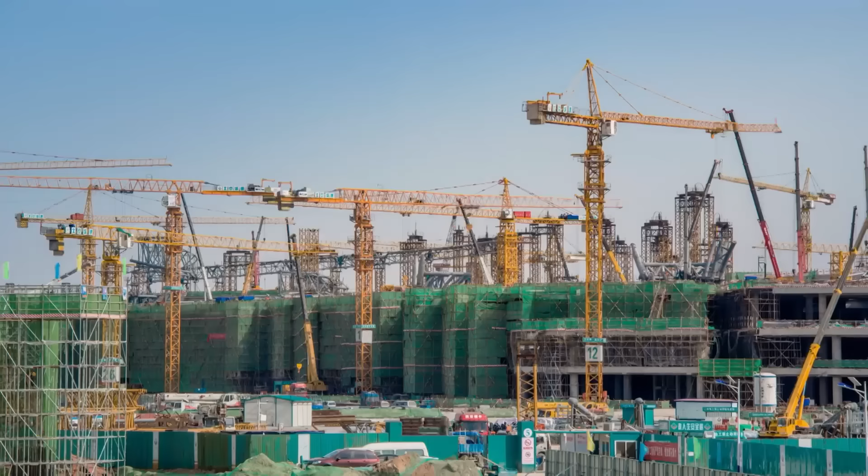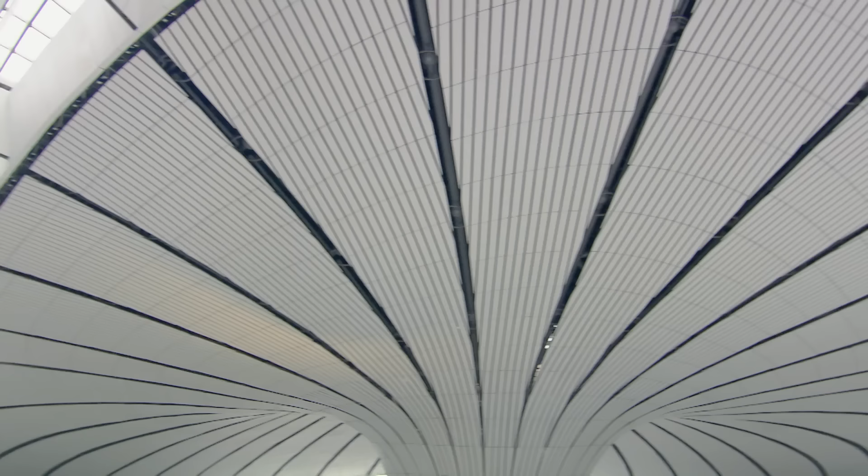The solution the engineers in China have come up with is stunning. This is the brand new Beijing Daxing International Airport. Currently under construction, it's set to become the biggest airport in the world. Wendy is getting the chance to see it before it opens to the public. Wow, I cannot believe how high the ceilings are. All of those dips and swirls are super amazing. It's very beautiful, very big, so exciting to see such a huge terminal here in China.

This airport is a benchmark for airport construction. We use a lot of cutting-edge technology to make this impossible project possible. I feel like an ant in this gigantic structure. Super grandiose, and you can barely even see how the structure is done. It's really well designed. Barely see any columns here. It's really amazing what the engineers have done here.

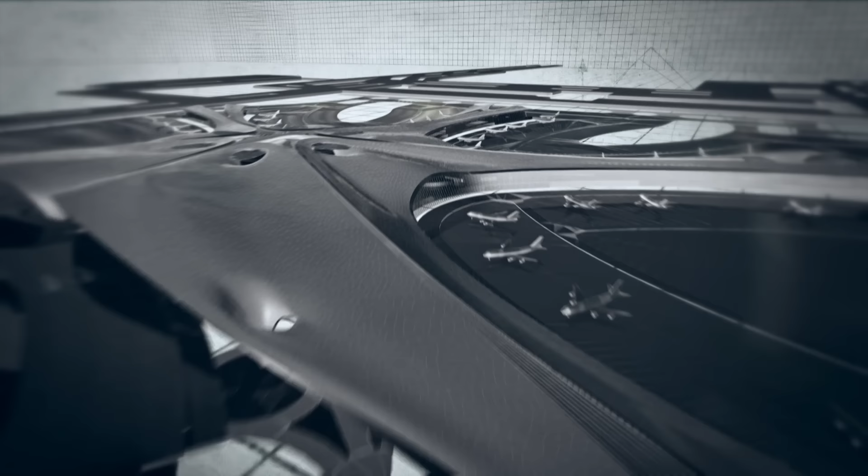Occupying more than 45 square kilometers, Daxing Airport's site is 2/3 the size of Manhattan. The spectacular star-shaped terminal covers 700,000 square meters, with a massive roof constructed from 52,000 tons of steel, equivalent to 500 steam engines. By the time the entire project is fully completed, it will include a record-breaking 6 runways and could see 100 million travelers every year. But with the old airport at crisis point, constructing this immense terminal is a race against time.

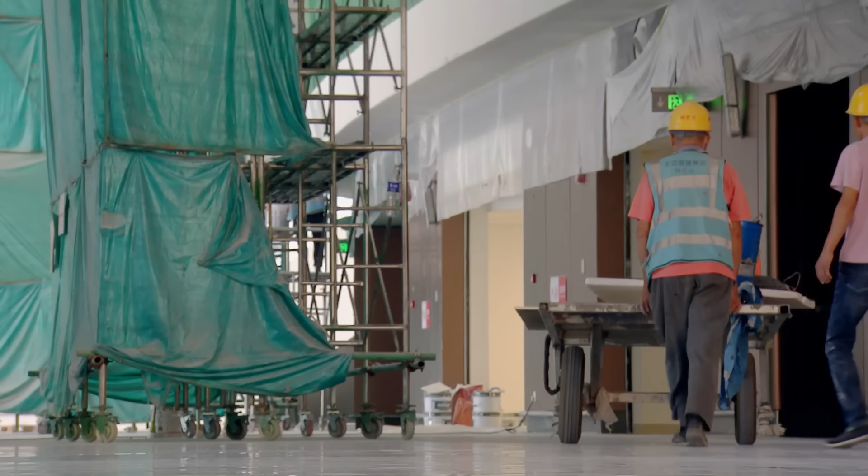我认为呢，航站楼最大的难点。 Wendy is finding out more from Deputy Engineering Manager Gao Aiping. 建设工期只用了3年零9个月。 So Mr. Gao is saying they need to build this entire terminal in 3 years and 9 months. That is an incredibly short amount of time to build an airport. Rapidly laying the groundwork for this extremely complex megastructure was the first step.

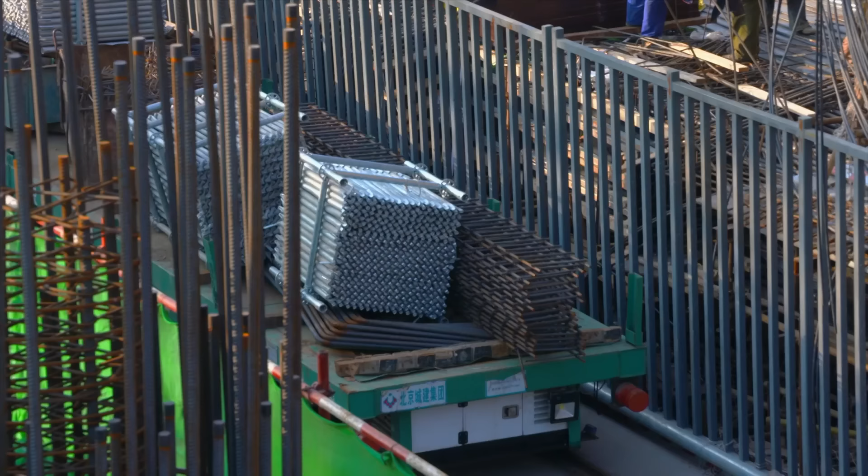How many people are making this project possible? 我们在施工的高峰阶段，航站区总人数近2万人。 Oh wow, that's actually pretty amazing. At peak times, there's about 20,000 people working on this project. And you could actually see there's a huge amount of people just working on different parts of the construction right now. With this vast workforce, it's hoped this entire terminal can be completed in record time.

But first, there are still major engineering obstacles to overcome. How do you move millions of passengers through the airport efficiently? How do you build the terminal's colossal, intricately curved roof? And most crucially, how do you protect the airport from devastating earthquakes? I think this is one of the most structurally impressive engineering projects in the world.

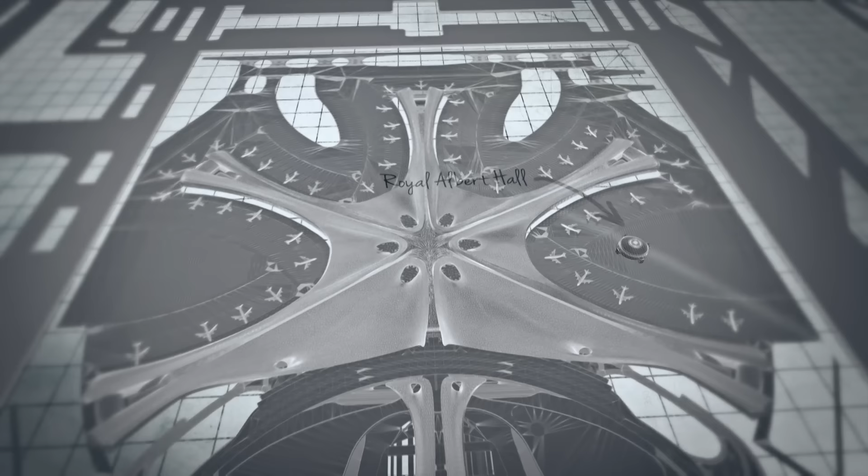Beijing's current airport is under tremendous strain. With China on track to become the biggest air traffic provider on the planet, the situation is critical. The solution? The new Beijing Daxing International Airport, set to be the largest in the world, with a terminal of epic proportions. At 700,000 square meters, the building is equivalent to 149 Royal Albert Halls. With high-speed train and metro links, this is the world's largest integrated transport hub.

But before this astonishing structure could be built, there's a crucial challenge with the design that needs to be solved. New York-based architect Wendy Fock has special access to visit the airport site. Getting to your gate at the airport sometimes is an impossible feat. You sometimes get lost, you don't see the signage, and sometimes you're just rushing in general. For a huge airport like this, to get over 72 million people through its gates, it's going to be super difficult. Designing the airport to guide passengers through it is something that engineer Wang Chung has to solve.

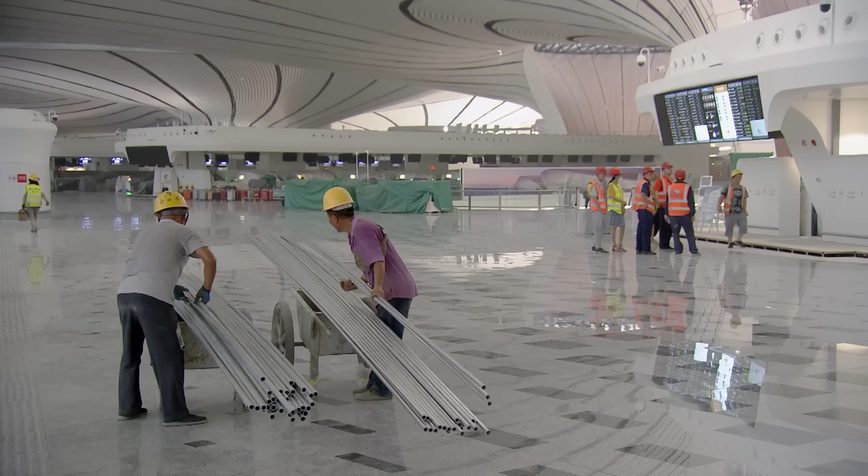If people cannot find the right direction, it will cause chaos in the terminal. So it's really important to get it right. But it's an exceptionally difficult problem for engineers. Passengers are unpredictable. Sometimes passengers will make mistakes, so we have to provide different passenger routes however they come. It's an extra challenge for the designer. So how do you move people around the airport efficiently? To find the answer, the team will need to draw inspiration from the pioneers of the past.

This is Midtown Manhattan. It's the heart of New York City, the largest city in the United States, and by virtue of being a place where everyone wants to be, one of the busiest cities. Architect Cara Michelle is investigating how her 19th century predecessors dealt with a sudden increase in demand for public transport. So it was an incredible challenge for the early architects of New York City to figure out how to get people onto and off of the island, especially during a time of unprecedented population growth. So figuring out a solution for how to transport both regular commuters and long-distance travelers on a daily basis was really difficult. A massive new transport hub would need to coordinate the smooth movement of people through it on a scale which had never been attempted before.

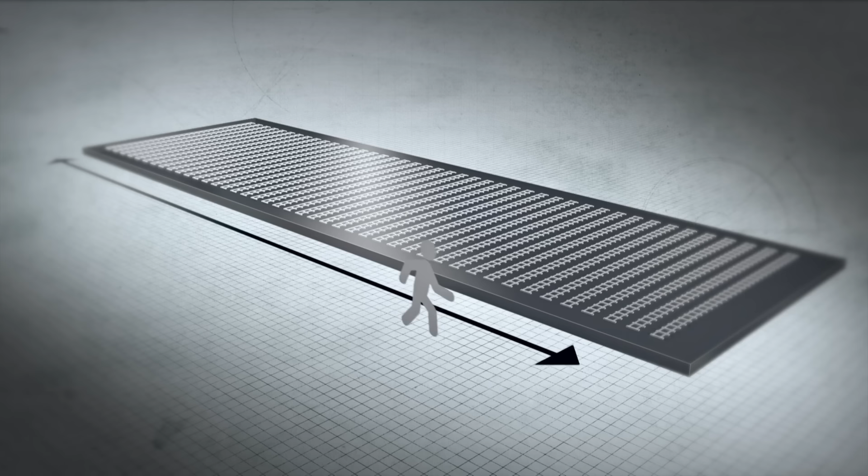Another one of the many innovations in Grand Central Terminal is the fact that the tracks are actually on 2 levels. Usually, rail tracks are laid out in a row. But with 44 platforms at Grand Central, that's a long way to walk. By splitting the tracks over 2 floors, it's less distance for passengers to walk. And there's another benefit. So you have long-distance passengers who need a little bit more time to get on the train, have more baggage on the upper level. And then you have short-trip commuters on the lower level. And another innovation is looping tracks. So they're actually dropping passengers off on one platform and then looping around to board departing passengers on another platform. Every piece of the design and architecture in Grand Central Terminal is really focused on getting people moving more efficiently and more quickly through the station.

Grand Central Terminal is a world first. Despite being built in 1913, it still works brilliantly today. So what Warren and Reed accomplished here over 100 years ago truly revolutionized the design of transportation hubs. And it's a wonder to think that designers of transportation hubs all over the world are still looking to this space to understand how to effectively move people around. I mean, it's really a marvel and a monument, almost a cathedral, to good engineering.

In China, engineers have built upon Warren and Reed's groundbreaking designs to create this cutting-edge 21st century airport. Instead of having the 79 departure gates in a row, they came up with an ingenious way to compact them and reduce walking times.

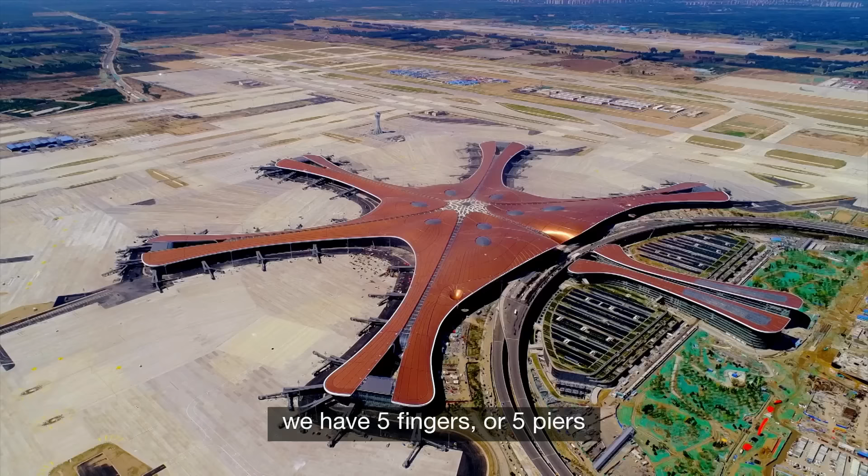The shape of the building is like the hand. We have 5 fingers or 5 piers. And also we control the size of the terminal. From center of the terminal to the furthest gate, it's just 600 meters, which means it will just take you 8 minutes to go to the furthest gate. It's excellent considering the size of the terminal.

To help people spot their gate quicker, engineers used another strategy. We create open space in the terminal, and for passengers, it's very easy to find the gate signs in this kind of open space because there's no columns, no barriers to block the sign.

Just like at Grand Central, Daxing Airport is engineered to keep different types of travellers separate so they don't get in each other's way, whilst ramps and travelators help keep people moving. This is the center pier, is for the international flights. This side, the two piers, is for the domestic flights. The other side is two piers, is also for the domestic flights. And passengers from check-in counter to the gates, they always go down with one clear, efficient direction to optimize the passenger flow.

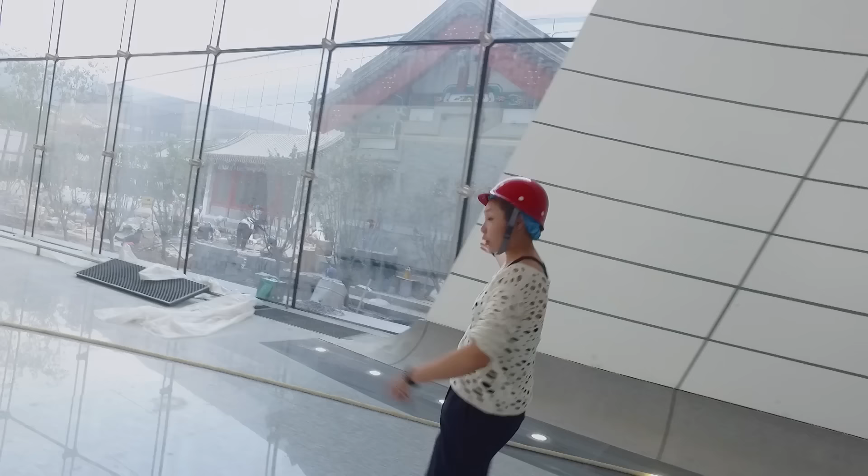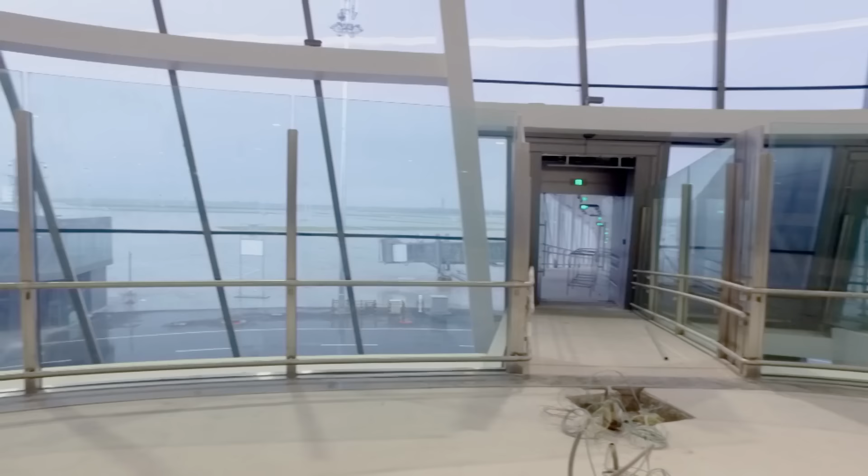See behind me this beautiful Chinese garden that's still in construction. And we're close to the end of the terminal. So here we are at the end of the terminal. We've made our flight. Despite being such a huge airport, took less than 6 minutes. That's under what the engineers estimated. That's pretty incredible. Coordinating the movement of a potential 100 million people a year is a massive achievement for the engineers of one of the largest terminal buildings ever constructed.

The Daxing Airport buildings cover 700,000 square meters. When finished, the 7 runways will accommodate an astonishing 880,000 flights per year. In China, air travel is booming. To cope with the increased demand, something exceptional is needed. So engineers are building the Beijing Daxing International Airport, a cutting-edge transport hub on a scale never seen before.

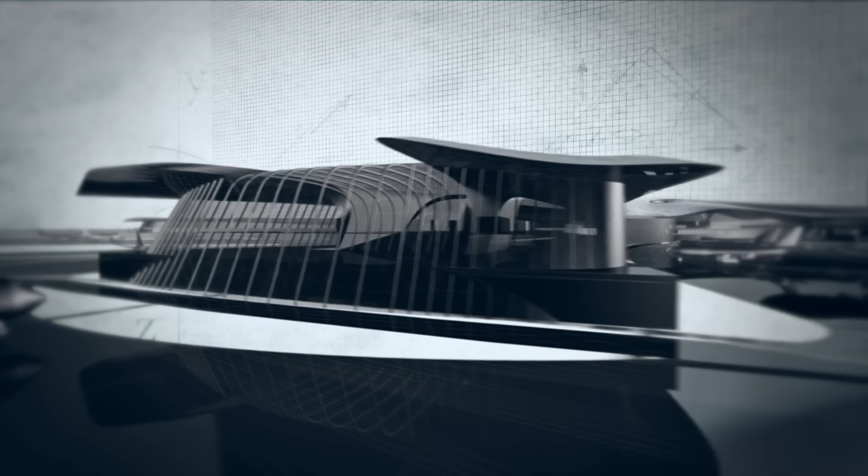Handling 880,000 flights a year, the terminal is constructed on the world's biggest seamless slab of concrete, which at 180,000 square meters is more than 7 times the size of Rome's Colosseum. I think it's a beautiful structure. Architect Wendy Fok has been invited to explore the airport before it opens. Personally, I really love how the span of this entire building is actually from a center point. It's really cool. I think the structural engineers did an amazing job here.

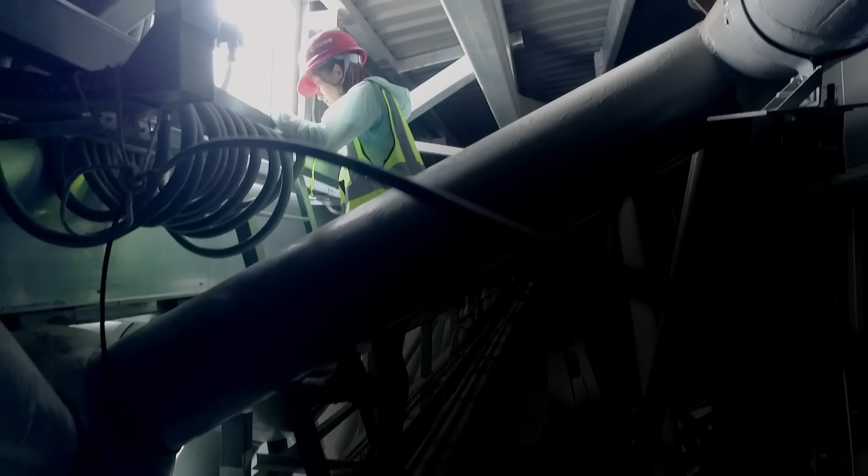Constructing a single terminal building on such an unprecedented scale was a huge challenge for engineers like Lei Su, who has special access to one of the project's biggest challenges. Be careful here. The enormous roof. The roof is very big, we can see. The area is 180,000 square meters. It's one of the biggest terminal roofs in the world. It's not only a structure, it's like a piece of artwork.

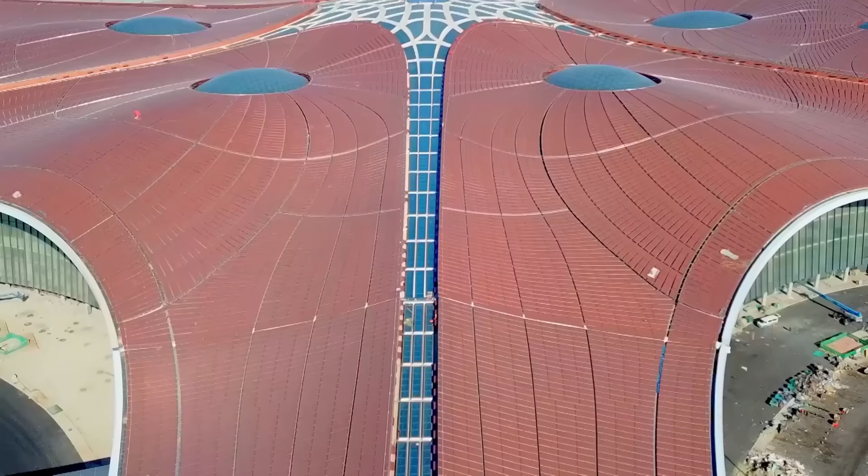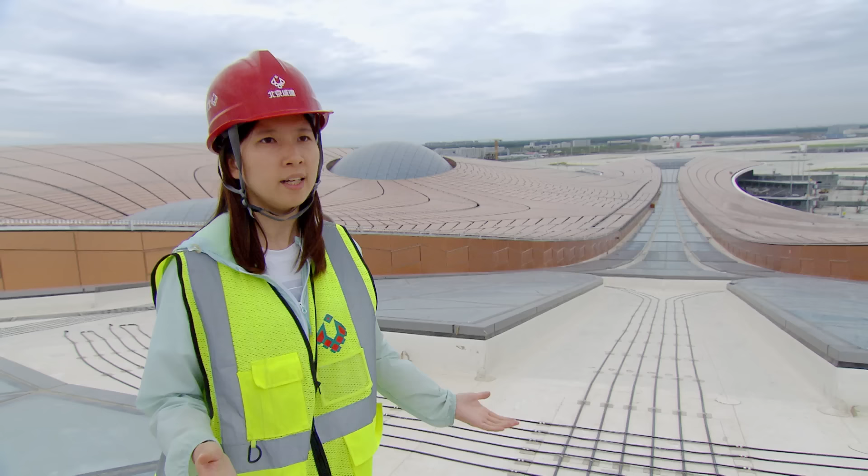The artistic roof is an extremely complex shape with multiple flowing curves. It's very difficult to build this kind of roof because the curves have different directions, and from the high point to the lowest point, the height difference is almost 27 meters. Building this kind of roof is the biggest challenge of the terminal construction.

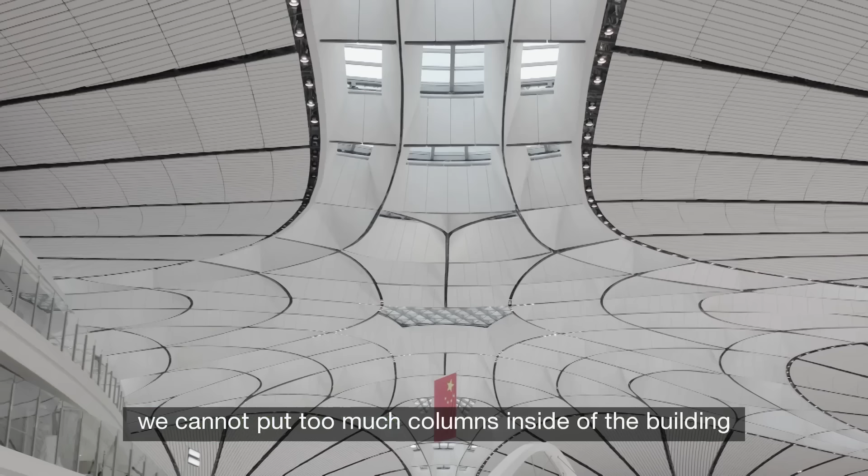The problem was made even harder by the need for an unobstructed space inside the airport. In order to make much more space inside, we cannot put too many columns inside of the building. So how can we hold such a big roof with fewer columns? A traditional concrete and girder roof would be too heavy. So to solve this seemingly impossible challenge, engineers would need inspiration from the pioneers of the past.

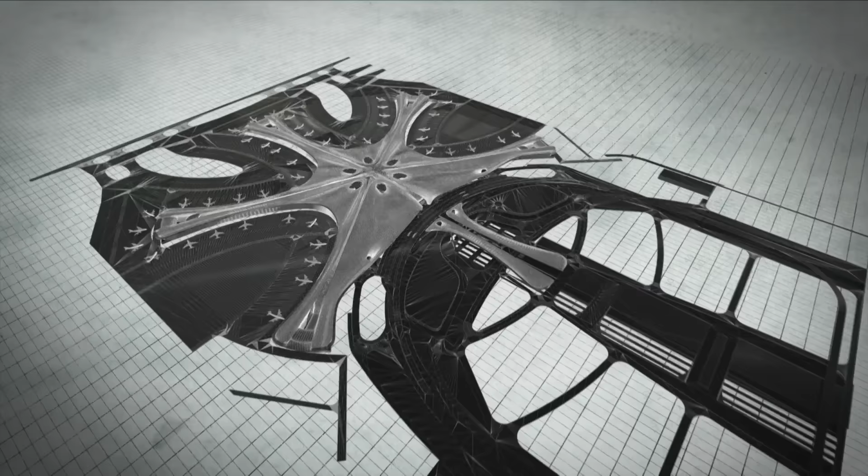We are in Split, very old, beautiful Mediterranean town. We believe that we are the sportiest city in the world. Architect and sports fan Dinko Peracic lives in Croatia in southern Europe. In 1979, Split was chosen to host the Mediterranean Games, and the pressure was on to build a world-class arena. One of the biggest challenges was to make an athletic stadium for 55,000 people in the audience, and the design of the stadium had to be something really special.

The games were held during the summertime, so it would be definitely too hot for spectators. So the roof had to be built to protect them, and it was important that the roof doesn't have supporting columns. They would block the views, so it was a big challenge. And what engineers came up with is awe-inspiring.

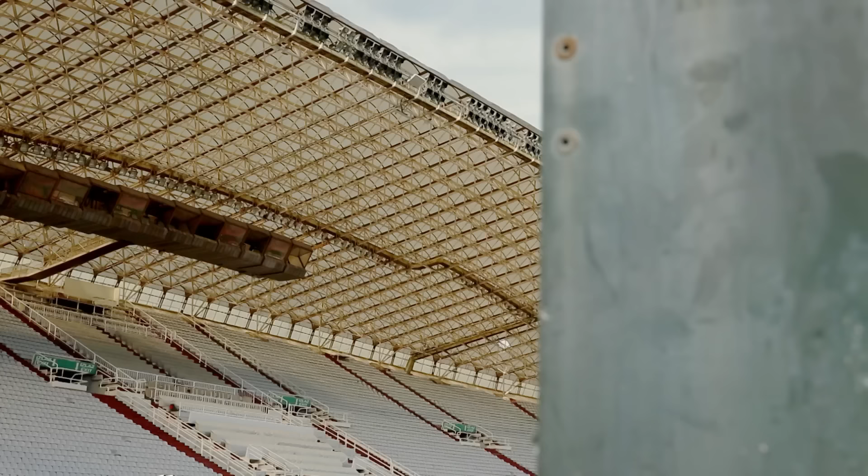Here we are, Sports Stadium Poljud in Split. Yeah, this is a wonderful piece of architecture, wonderful piece of engineering. These massive steel roofs are each 220 meters long, covering a combined area of more than 13,000 square meters. When it was built, this was the largest curved roof of this kind in the world.

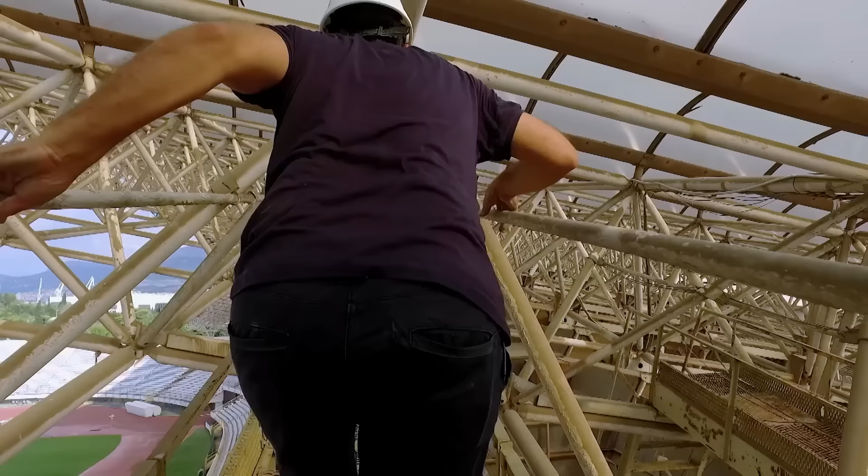These long-span roofs wouldn't have been possible without Alexander Graham Bell. Famous for inventing the telephone, in 1902 he became interested in flight and made huge wings of interconnected pyramids. The technique became known as a space frame. And Dinko has a unique opportunity to take a closer look.

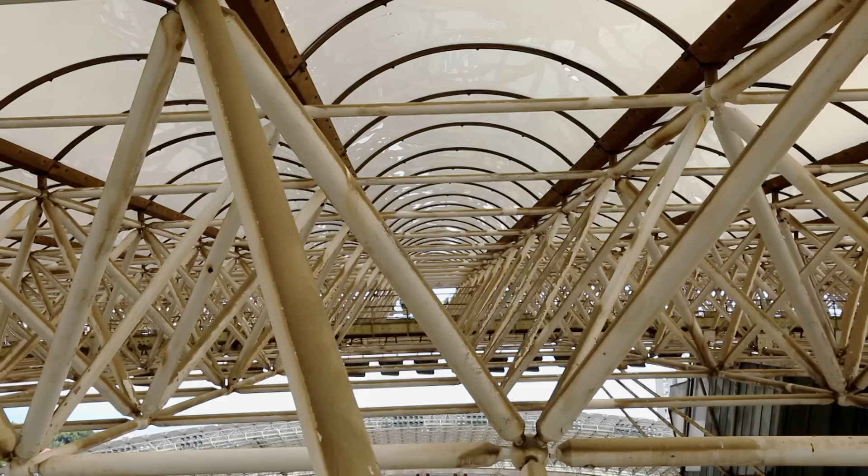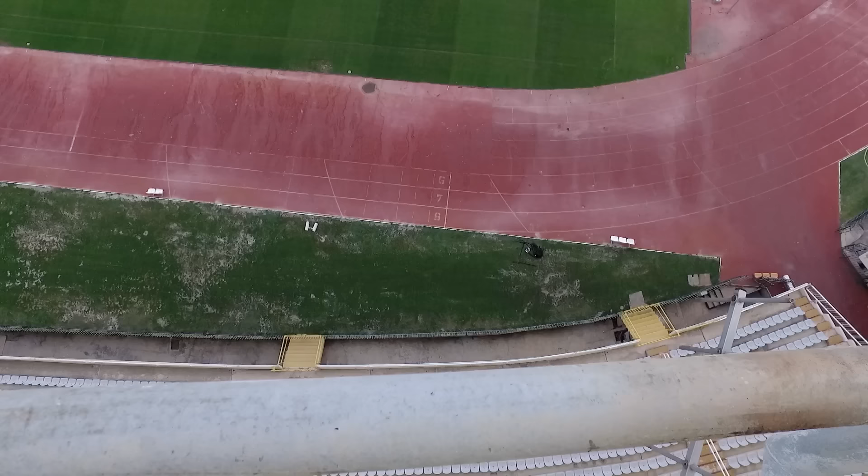Yeah, here we are in the roof. This is a space frame construction. This is a structure that normal people can see just from below. You see that there are no columns supporting you. There is just air below us. I have to hold my helmet so that it doesn't fall down.

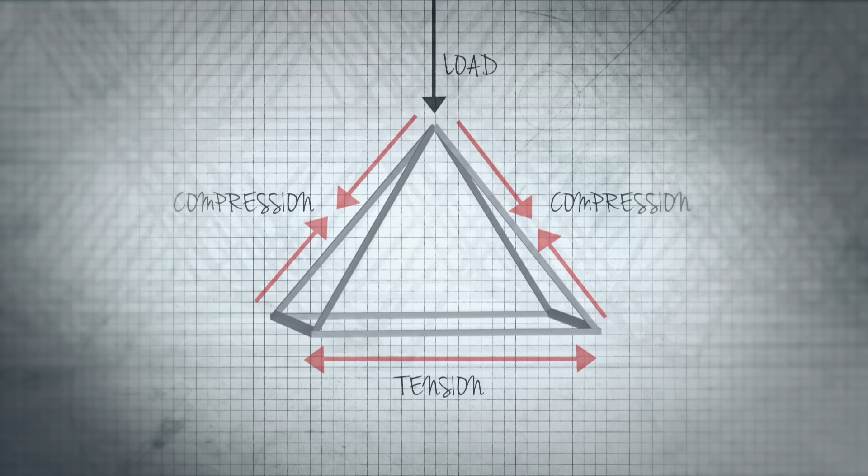Here we have those triangular pyramids made out of 12,000 poles and more than 3,500 balls, creating this shape, this spatial structure. Pyramids are very strong in all directions because they spread forces evenly. And these frames don't need much material to build them, so they're also very light.

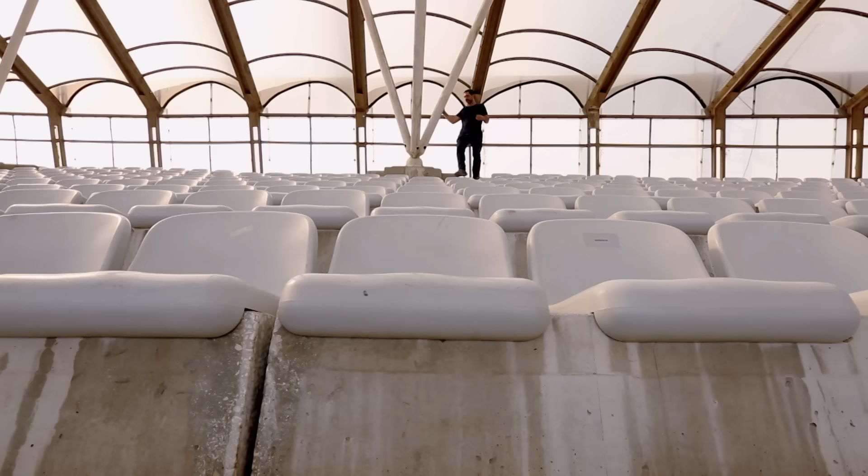Space frames are made of straight poles, but this roof has multiple curves. To show how this is possible, Dinko is building his own space frame. And this is a very lightweight structure. This space is mostly air. There is just a minimum of material. The story becomes interesting when we start to multiply these elements. We can simply connect them together and get a chain of pyramids, which is actually creating a spatial frame.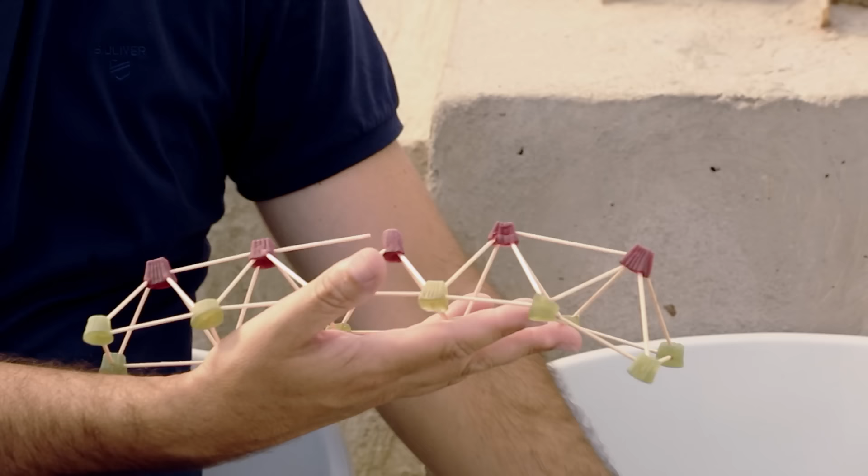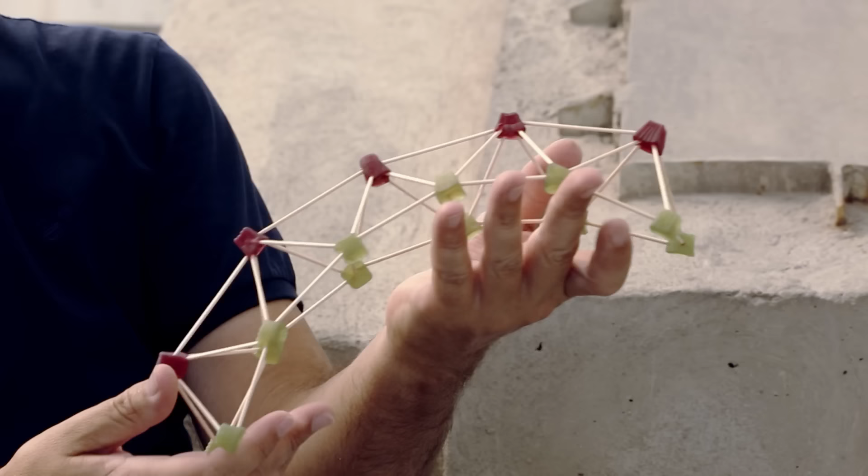To make this roof curved, engineers made some of the poles longer and changed the angle of the connections. By simply introducing longer poles, we get a curved structure. It's almost like a fabric, which can be very flexible to work with. In these two roofs, there are more than 1,000 different lengths of poles and more than 1,500 different connections. But to calculate each of those elements, it's really complex.

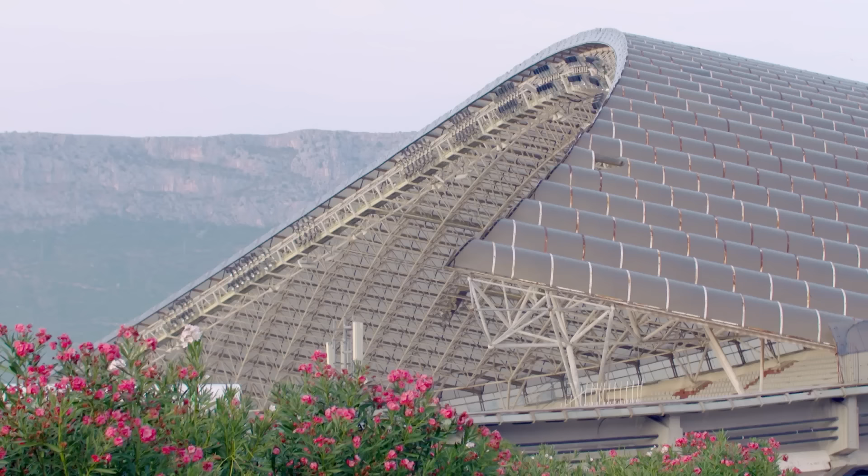For decades, calculating the thousands of different elements required for a multi-curved roof was thought impossible. But advances in another field provided a breakthrough. So the roof of this stadium was the first one where computers were used to calculate these specific elements. Using computers here proved space frames could form almost any shape of long-span roof. Essential for the engineers in China.

70 years after Alexander Graham Bell invented his space frames made out of triangular pyramids, it was used in a very creative way here in Poljud, in this stadium. I'm really proud that I'm part of this culture that was able to construct something like this.

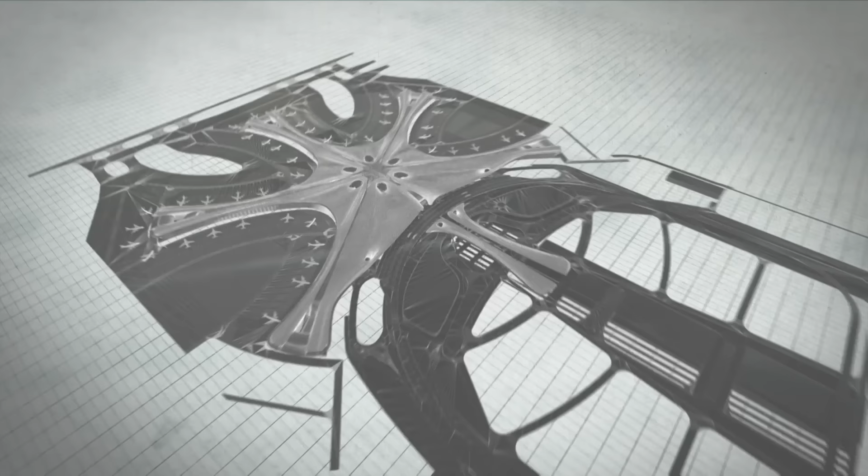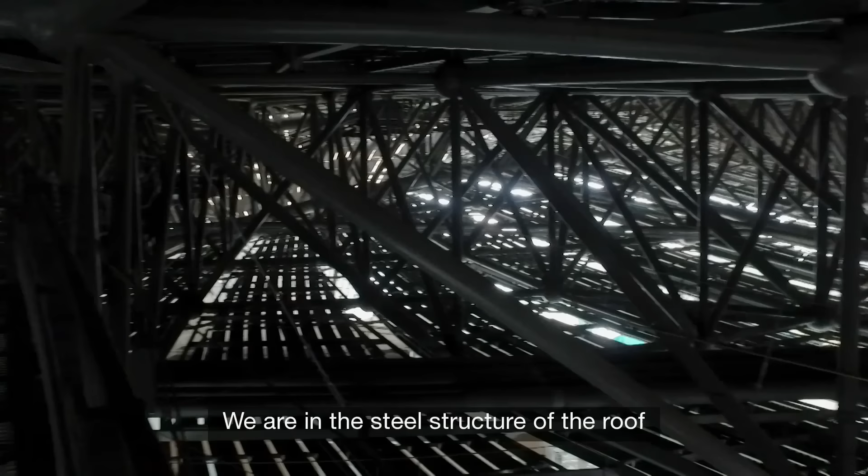Engineers in China have taken the space frame innovation and created a roof 13 times the size of that on the stadium in Croatia. This jaw-dropping structure that makes this terminal roof possible is completely hidden from passengers. But Lei Su has permission to see it up close. We are in the steel structure of the roof.

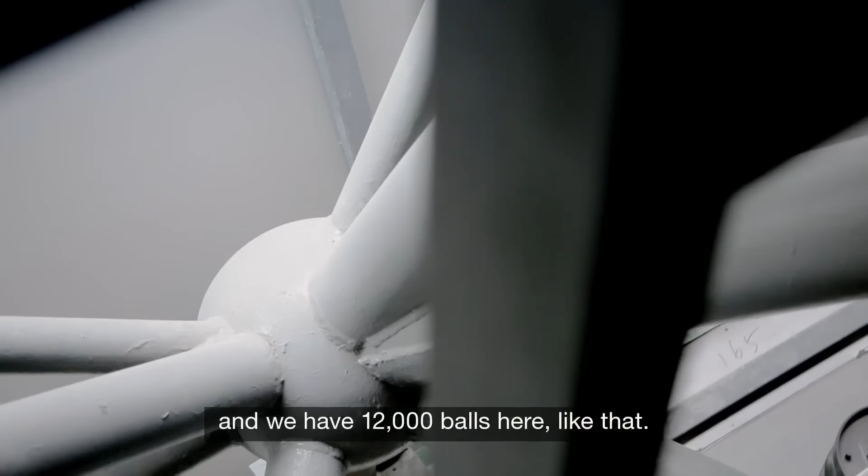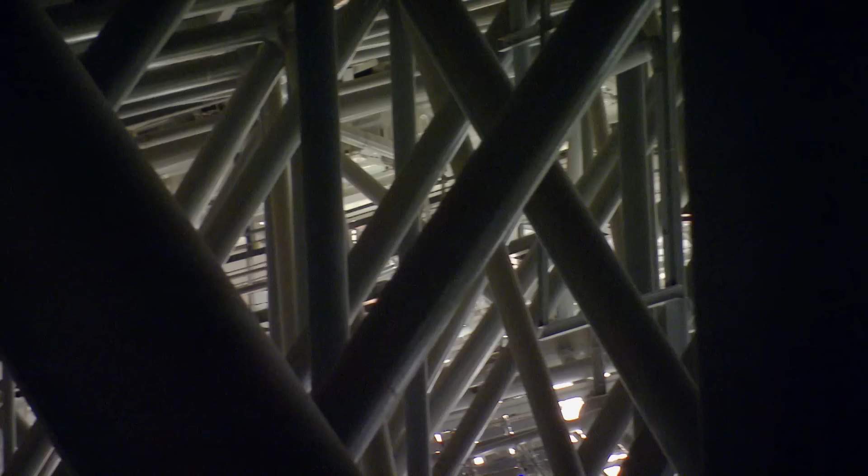We have 63,000 poles like this, and we have 12,000 balls here like that. We use a steel structure so it can meet the stiffness, but it's still very light. With the help of computer design, these poles and balls could form the complicated multi-curved roof.

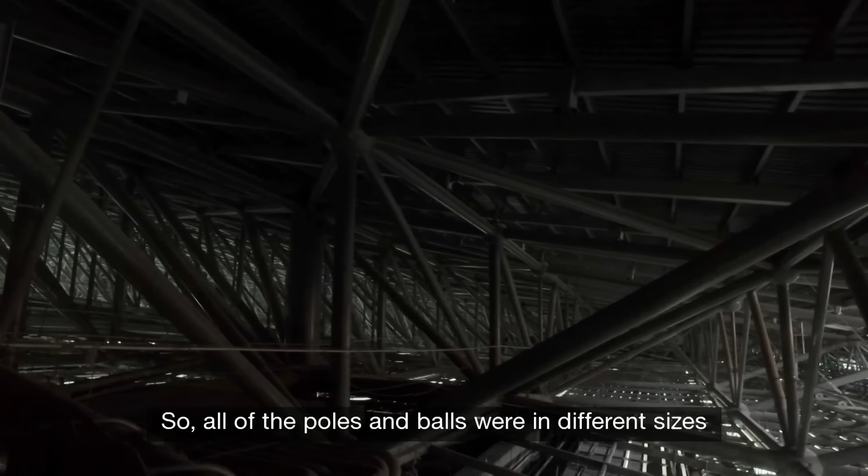We have many kinds of curve, so with the ball and the post, it's easier to meet the different shapes of the design. So all the poles and the balls are in different sizes. Some are long, some are short, some are big, and some are small. With 75,000 individual parts, assembling this supersized roof could be a big challenge.

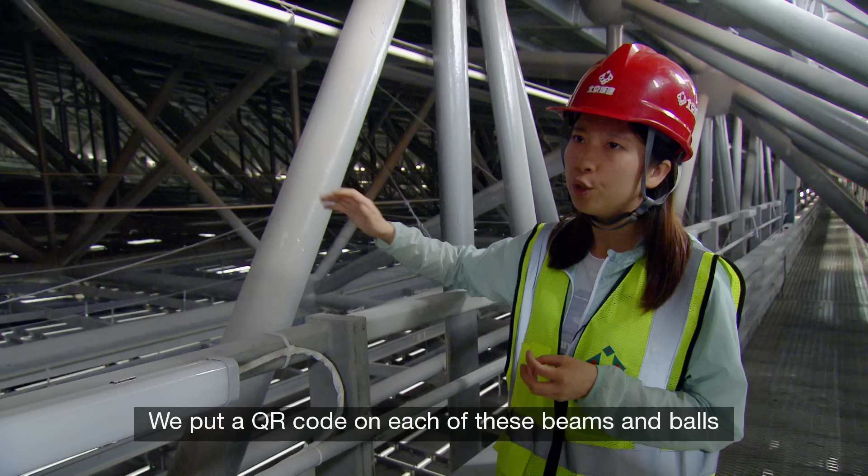Because we have many kinds of posts and balls, we use a new technology. We put a QR code on each of these beams and balls. So with this, we use a mobile phone to scan the QR code, and we know exactly where the ball and the pole go on the roof, and we can put it together very smoothly. Once the basic shape of the terminal was in place, the complicated space frame roof could be built.

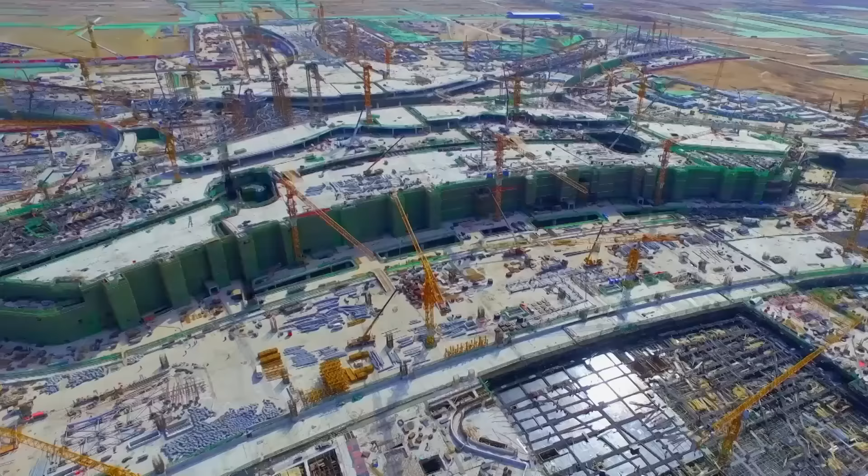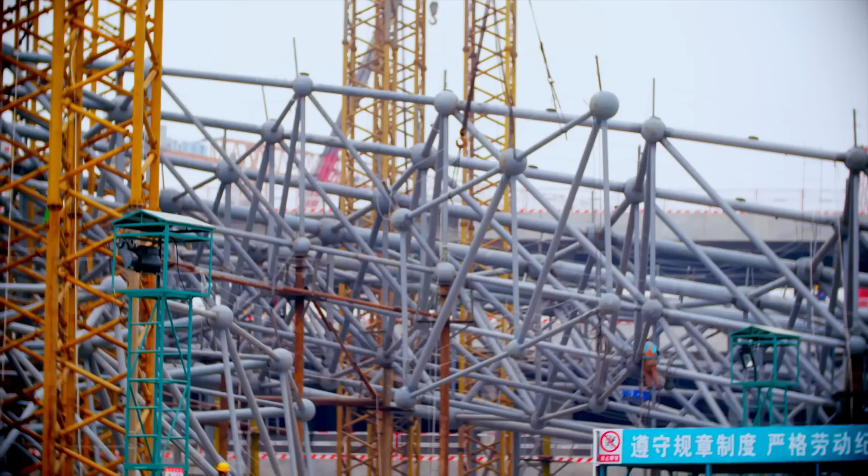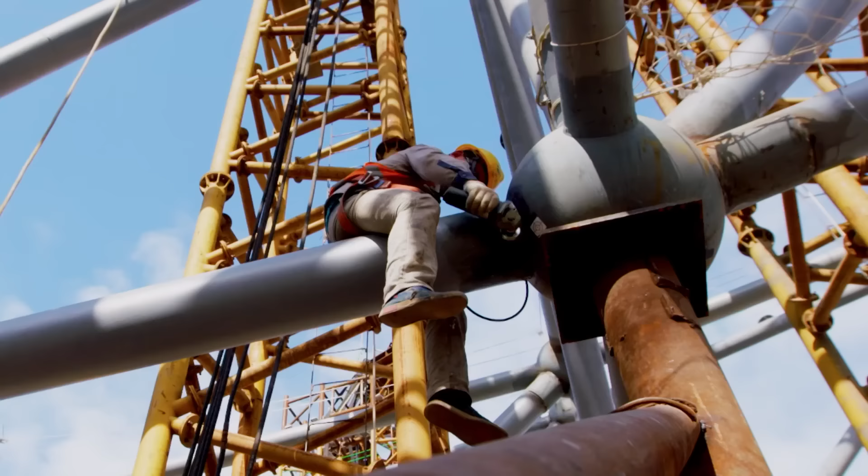First, 8 huge columns are made. Then the gigantic roof is constructed in several segments. We weld the tubes and the balls together on the ground and lift it. Each section must be positioned precisely, with 2mm accuracy. Any error could jeopardize the stability of the whole structure.

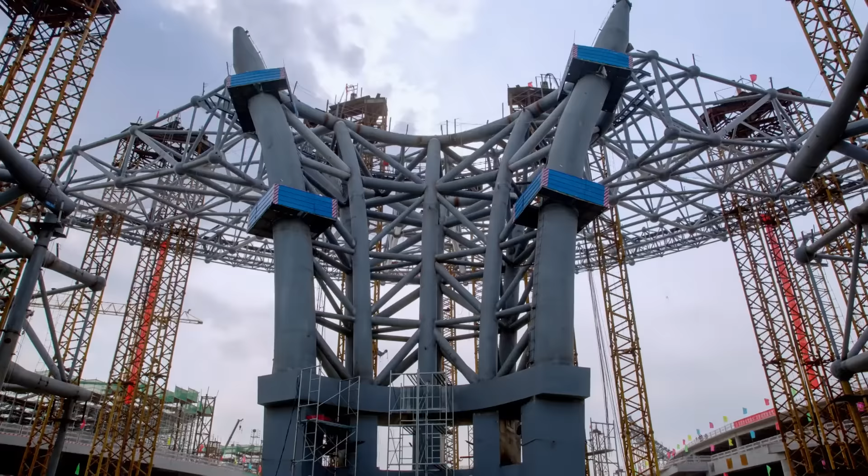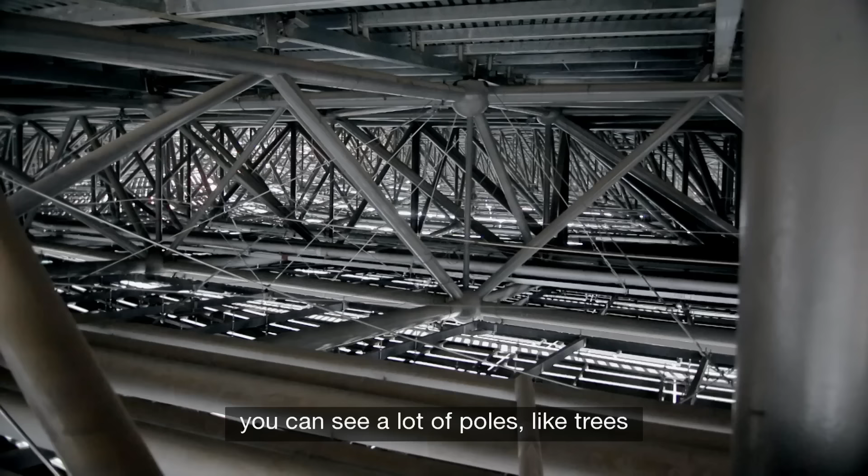We joined the sections together and formed one big roof. The center section is lifted last, completing this astonishing space frame. It's like a steel forest. It's very beautiful. You can see a lot of poles like trees.

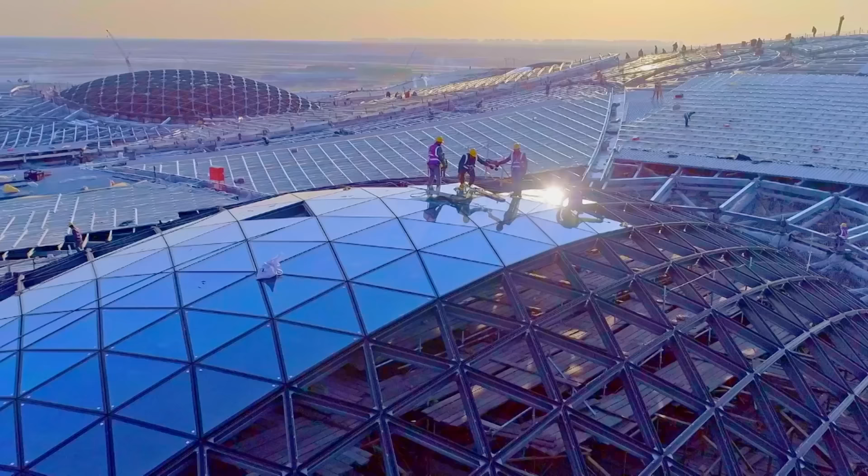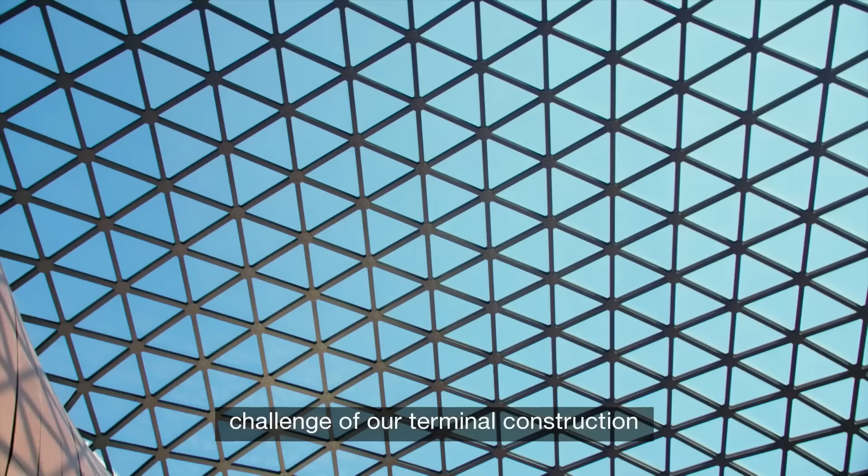Inside, cladding is added, which dampens the noise in the terminal. On the roof, 8,000 panes of glass make the skylights. And 40,000 sections of sparkling aluminium cladding finish this incredible structure. The steel structure is the biggest challenge of our terminal construction. What most impressed me is how fast we built it. I'm proud of it.

Visiting architect Wendy is taking in this gravity-defying marvel. For me, I think the roof structure is just absolutely incredible. You can barely even see any of the columns. Especially standing in the center point, you could really see everything from here. The colossal roof needs just 8 columns to support it, which is only possible because the space frame engineering allows such long and lightweight spans.

I think it's actually incredible that so many components were brought together to make this gigantic roof system. It required so many innovative systems to really put together the different pieces of the roof and then joining it with such precision. This is truly one of the most remarkable roof structures that I've ever seen.

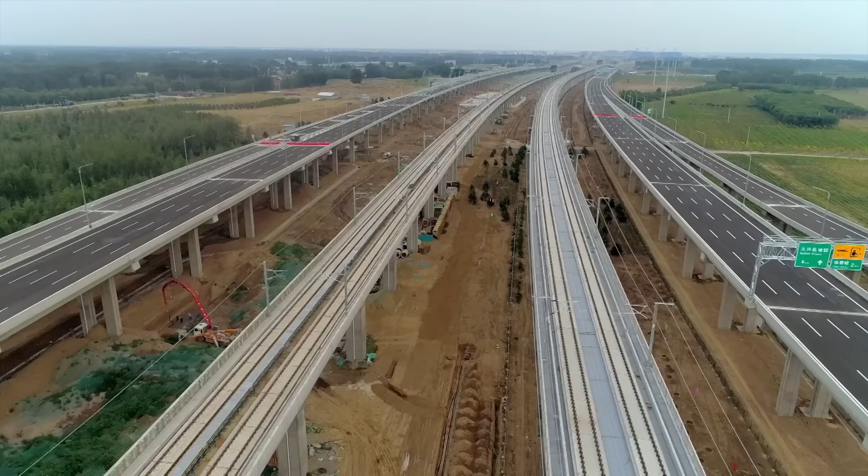Engineers in China are attempting to achieve the impossible. This is the Beijing Daxing International Airport, a futuristic engineering marvel, on track to be the biggest airport on the planet. The way that it's constructed is truly amazing. I think it is really remarkable that the engineers were able to make this happen.

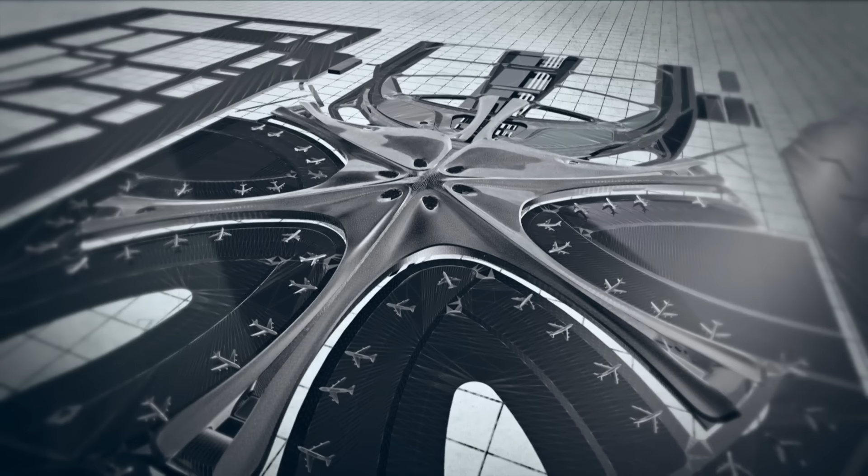Across the new airport site, 1.6 million cubic meters of concrete forms the runways and base of the massive 7-story terminal. Its steel roof weighs 52,000 tons and is held up by only 8 columns. Engineers must now take on one of the most serious challenges of the project. Beijing is located in the earthquake zone in northern China. In history, there are some major earthquakes that happened in this place.

It's a life or death problem that falls on engineer Wang Cheng and the design team to solve. It's really important to protect the terminal from earthquakes. There are tens of thousands of passengers and staff in and out of the terminal every day. Secondly, after an earthquake, the airport is usually the lifeline for the rescue supplies and personnel.

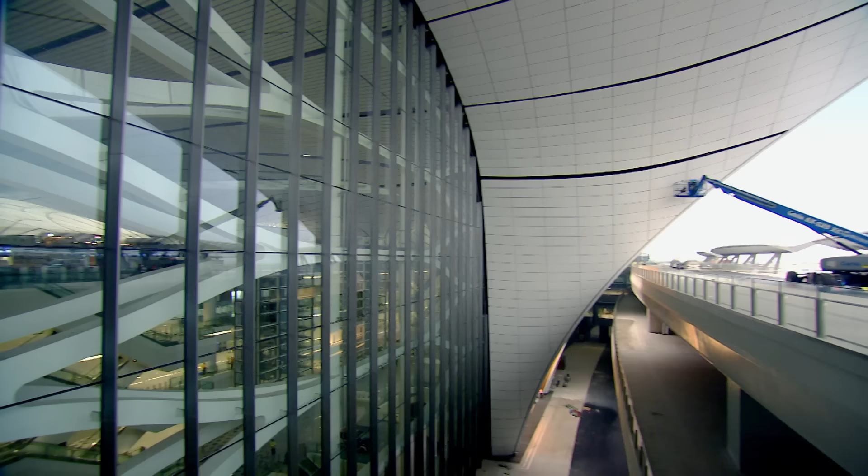It's common for Beijing to have earthquakes of 2 or 3 on the Richter scale, but they can be much more severe. It is a huge terminal. To protect it during an earthquake is very difficult. This is one of the biggest challenges we have to solve. During a devastating earthquake, how do you ensure this vast transport hub is protected and remains operational? To solve this critical problem, engineers must look to history's ancient innovators.

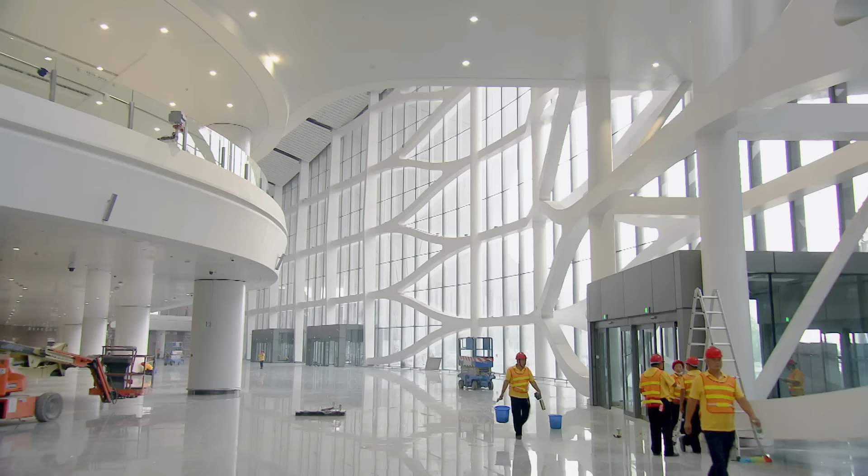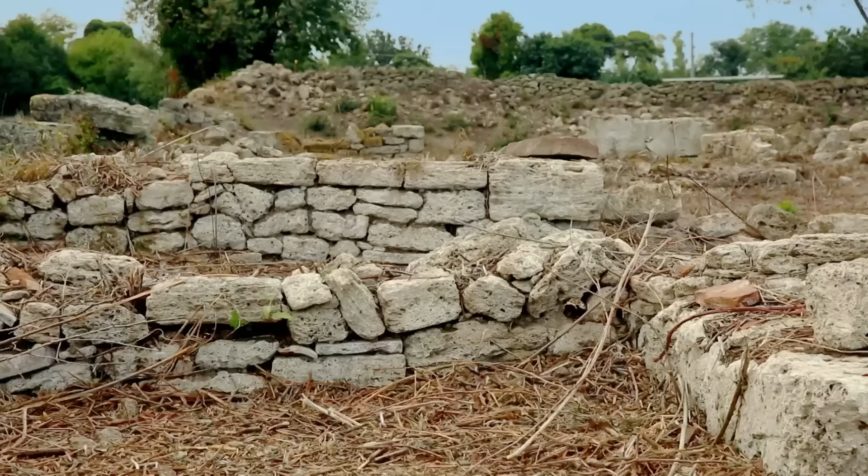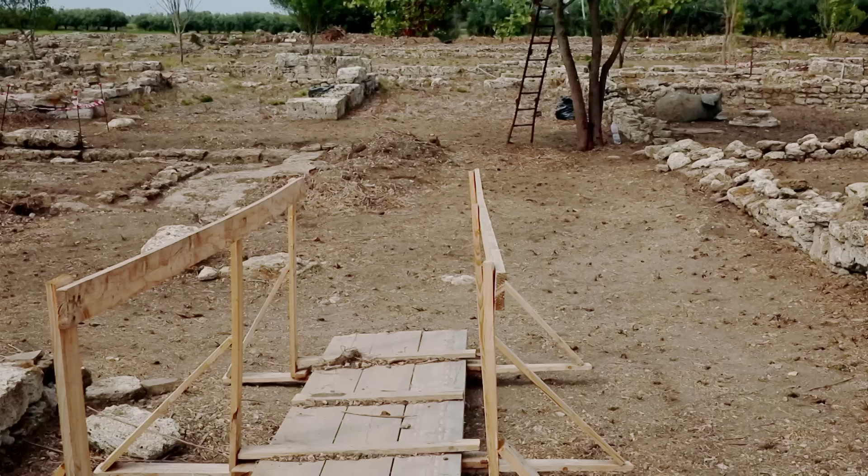Archaeologist Gabriel Zuchtriegel is investigating an ancient Greek settlement, which could help the engineers in China. We are in Italy, south of Naples, but the site we're looking at is actually a Greek site because the Greeks founded colonies in Italy, and one of them is Paestum, which was a big city founded around 600 BC. But building in Italy is difficult. It's one of the most seismically active regions in Europe.

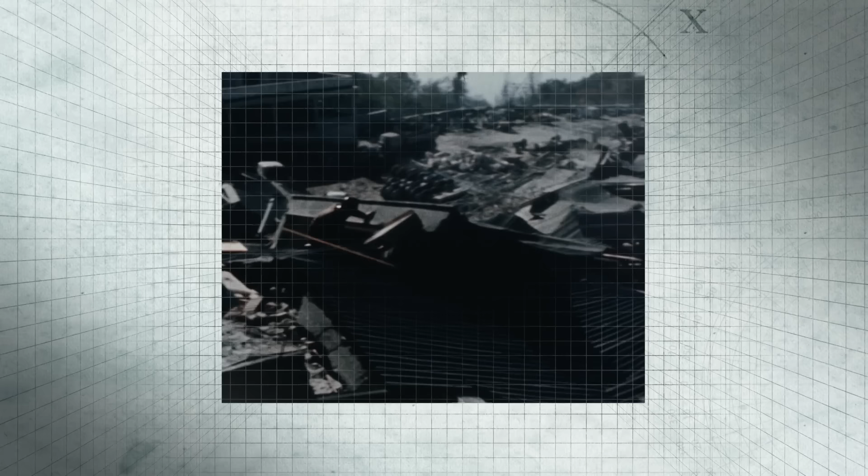We had some major earthquakes in recent years, and we saw that many modern buildings collapsed. What we see on some classical sites like Paestum is that there's still buildings standing from 2,500 years ago, and you ask yourself, how is it possible that these buildings have resisted for so much time? Ancient Greek civil engineers were master temple builders, and many have survived to this day. These are the stunning temples of Paestum.

We have 3 Greek temples still standing here, and the biggest one, the Neptune temple, has 6 columns on the short sides, 14 columns on the long sides, 5th century BCE, still standing. An extraordinary example of Greek engineering because it resisted all the earthquakes. Coming from a highly active earthquake zone themselves, the ancient Greek engineers had an ingenious way to tackle the problem.

While the foundations are very, very solid, the columns are much more flexible. And you see they are built of several pieces, we call them drums. They didn't use any mortar, and so it's not a rigid, solid block, but it's pieces, one piece sitting on the other, so they can move and swing up to a certain degree. And as soon as you have more than one element, the behavior of the column changes.

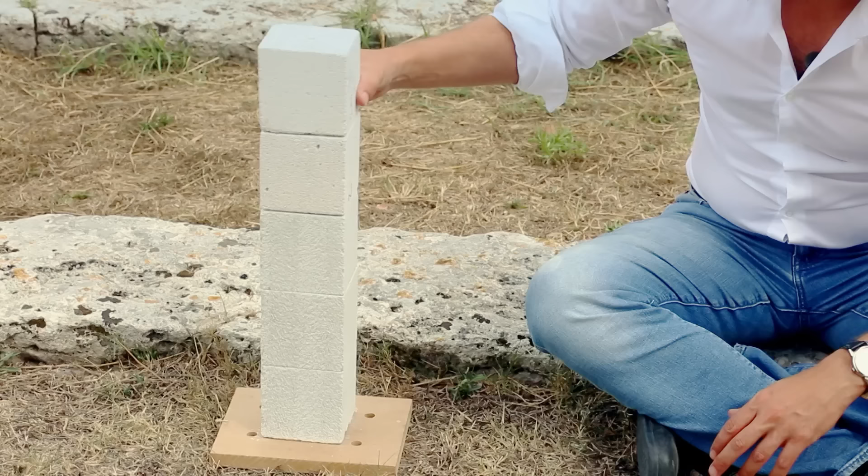Building columns from several drums without mortar was crucial to these temples' ability to resist earthquakes. It's a technique that could help the engineers in Daxing Airport. We have here our column, but it's one piece. We glued it all together.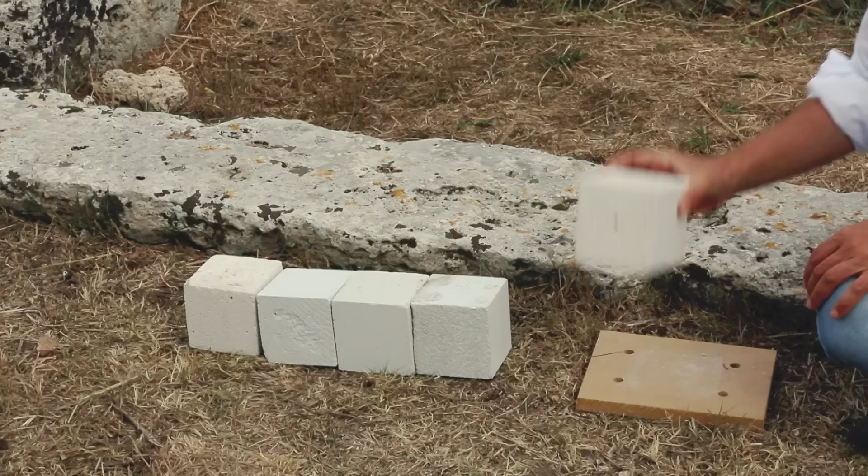So when we have an earthquake, we see that it shakes, it behaves as one piece, and you have a high concentration of energy here, and then it eventually collapses. The movement of the earthquake is totally transmitted to the top of the structure. But the column drums in these temples are not stuck together with mortar. So Gabriel is repeating the experiment with separate blocks.

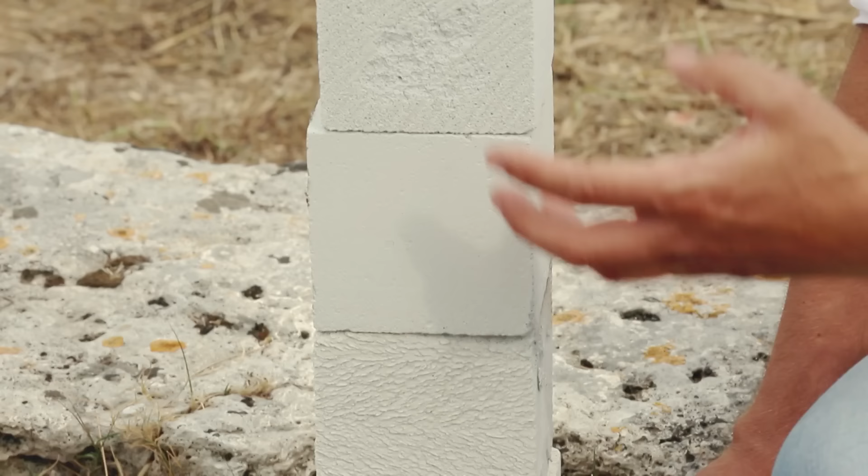And look what happens if you don't have one rigid piece, but a column built of several pieces. And now the earthquake comes and you see that I can put in more energy and it still doesn't collapse. And you can see how it opens and closes the single element. And basically each element absorbs energy, so much less arrives at the top than what the earthquake gives in at the bottom. So this is the original ancient Greek damper and isolation system.

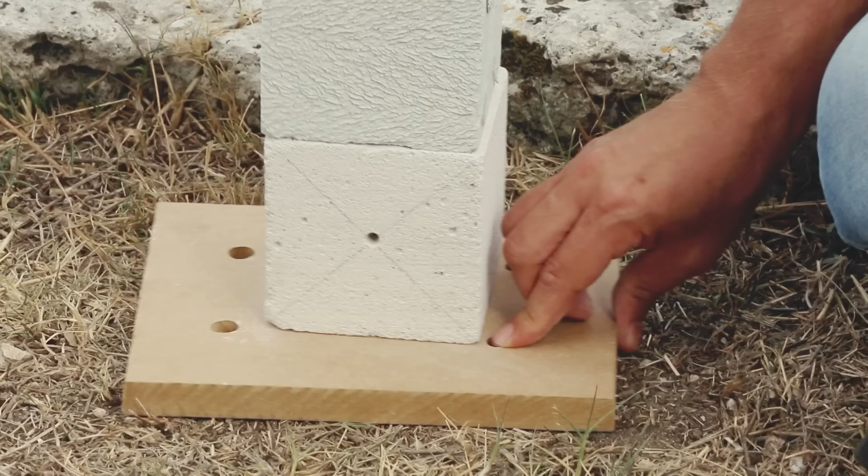This isolation method provides astonishing earthquake resistance for these monumental temples. This structure has been standing for 2,500 years. This is really a great achievement. At Daxing Airport in China, engineers are using similar principles to the early Greek temple builders to protect this pioneering terminal from earthquakes. But here, it's on a much bigger scale.

So right now we are at the basement first floor under the terminal. Look at the pillar. On the top of it, we install an isolation damper. The isolation damper is like a spring or rubber to protect the terminal from earthquake.

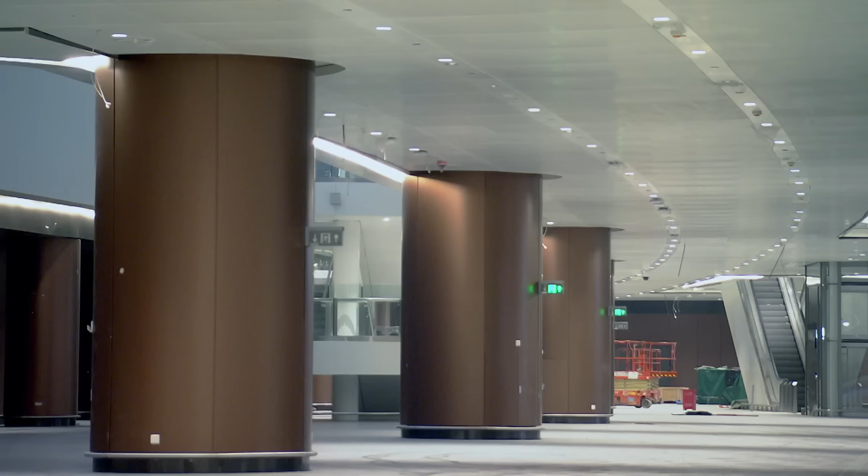Usually there are two kinds of movements during the earthquake, horizontal and vertical. And for the building, the horizontal movement is the most damaging. So the damper lets the building move forward and come back to the place where it was to release the horizontal earthquake energy.

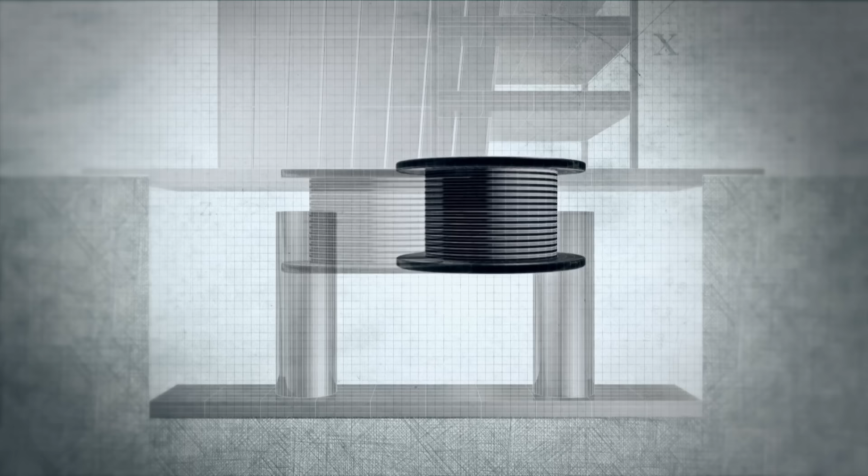The dampers are made from a stack of 30 rubber and steel discs on a spindle. Like the stones in the Greek columns, they're not stuck together. In an earthquake, instead of holding the building firm, they let it move horizontally back and forth. This dissipates the energy, isolating the terminal from the earthquake. They also have another surprising benefit for this unique transport hub.

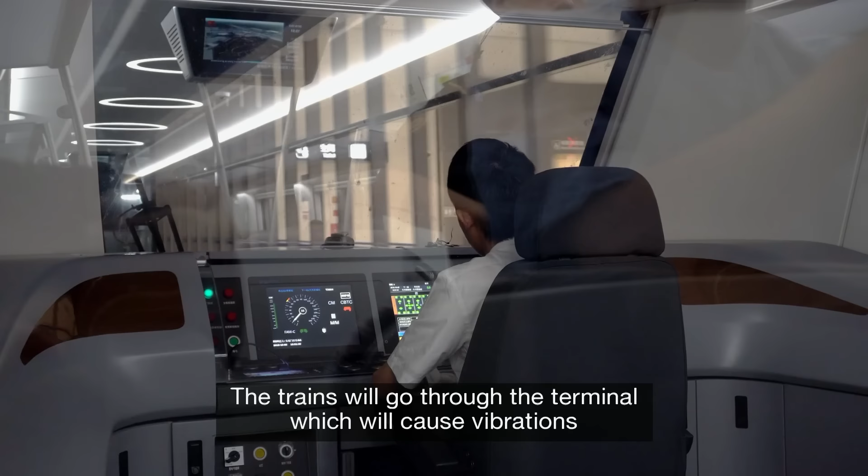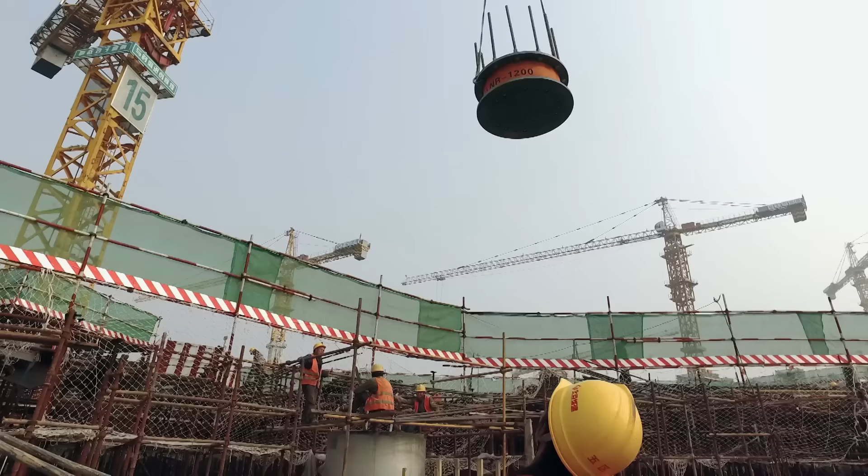The train will go through the terminal, which will cause vibration, and the damper can prevent the vertical vibration. So the passenger in the terminal will feel very comfortable and quiet with no noise. Throughout the site, 1,152 base isolation dampers were installed on top of the pillars.

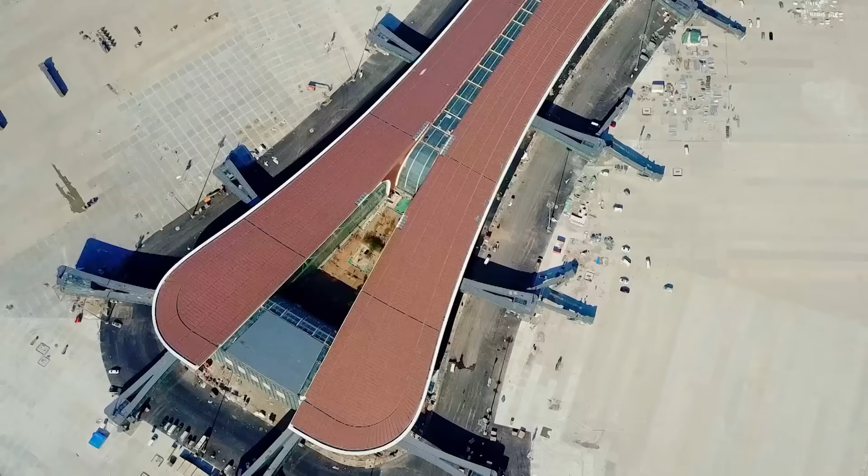The finished terminal can safely withstand earthquakes up to 8 on the seismic intensity scale, making it the largest anti-seismic building in the world. I think it is one of the biggest achievements in this airport.

Now, close to completion, New York-based architect Wendy Fok has privileged access to the airport construction site. Considering how massive this airport is, I think it's incredible that the engineers were able to find a way to make this entire terminal earthquake-proof. I think that's something that's truly remarkable about this project.

This entire terminal has been built in just 3 years, 9 months. A stunning achievement for an airport of this size. This is so amazing. This structure really just boggles your mind on how many pieces and how many people actually made this possible. It's truly an engineering phenomenon.

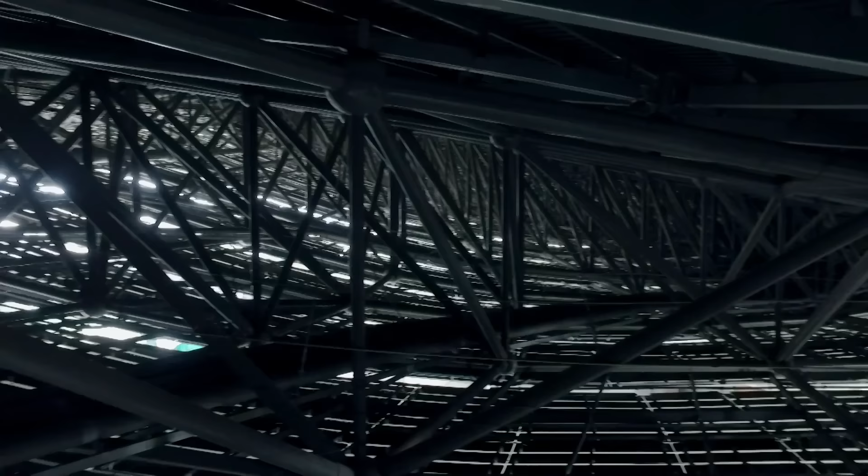This immense superstructure is an engineering masterpiece, combining the skills of designers and engineers from around the globe. At the moment, this terminal is one of the biggest engineering projects in the world. And I was so excited to work here. For the team behind this astonishing project, the achievement is immeasurable. In this terminal, I like the open space and the beautiful curve, which will inspire other airports.

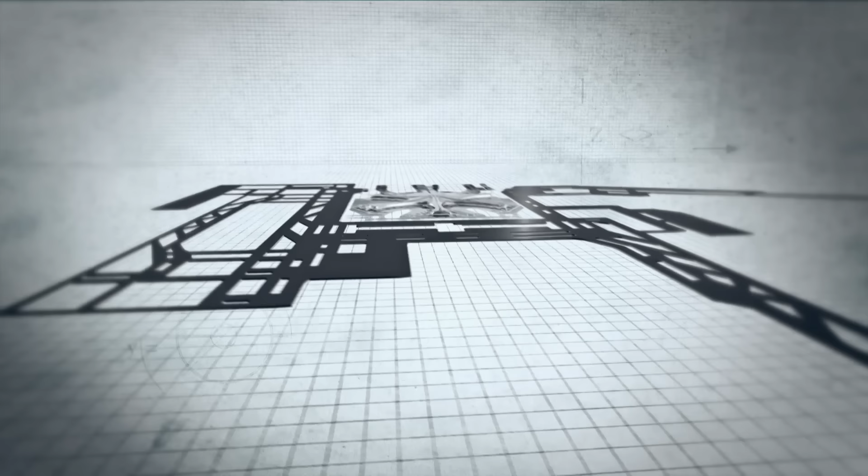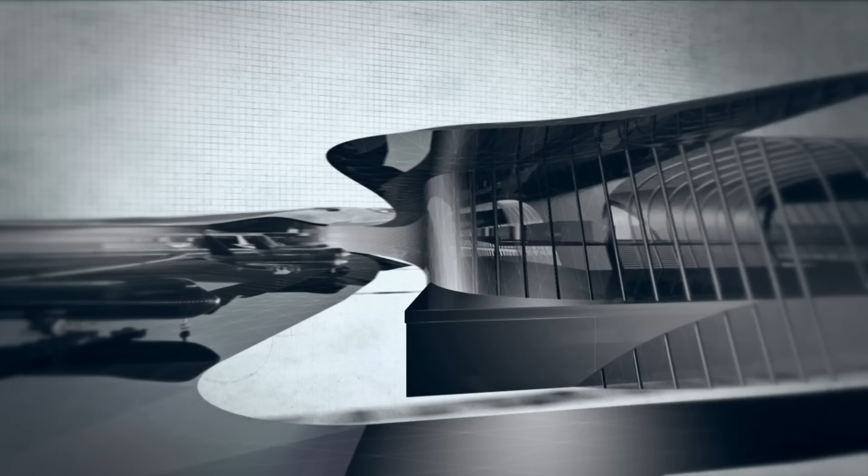This mega airport site is more than 45 square kilometers. The terminal is the star attraction. With 7 floors and a 52,000-ton multi-curved roof, it will run 880,000 flights a year. It's the world's first airport to have high-speed railway, subway and airport express trains all passing beneath it.

Now complete, the Beijing Daxing International Airport is becoming a vital transport hub for 100 million people every year. The terminal combines breathtaking design with cutting-edge engineering. This is actually one of the most beautiful airports that I have seen. Projects like this push the boundaries of what construction really could do.

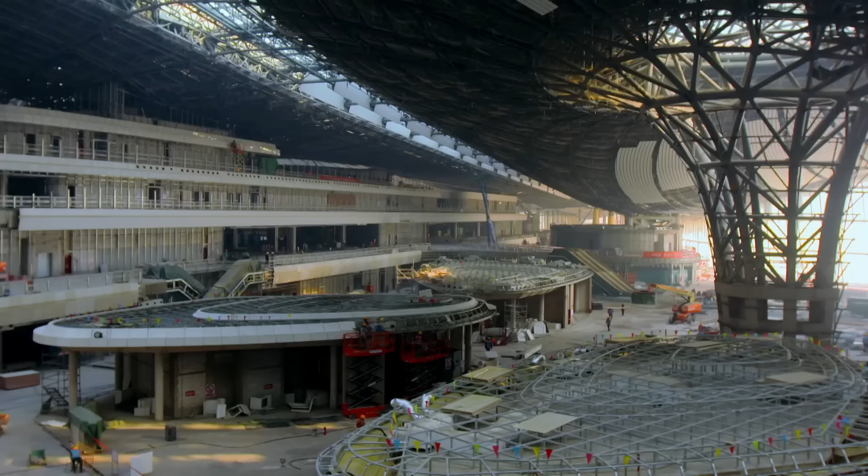When it comes to the terminal, I feel very proud. I have been an engineer for 16 years. This is the biggest and the most important thing I've ever done. Inspired by the pioneers of the past and overcoming complex challenges, engineers have pushed the boundaries of architecture and construction. When I come here to take flight with my family, I feel very excited and very proud. And they've succeeded in making the impossible possible.